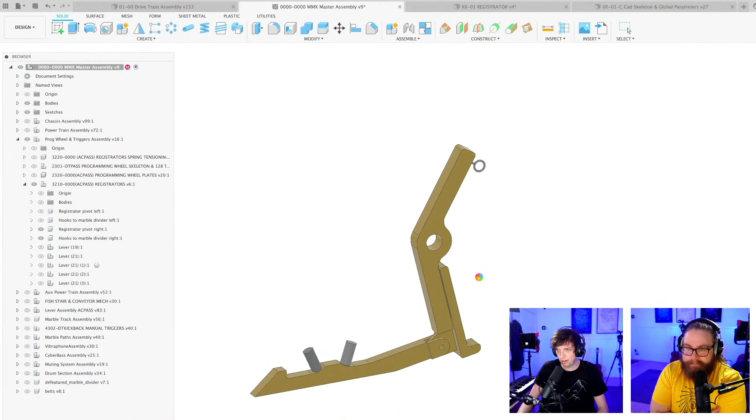Woo-hoo-hoo-hoo. Here we are. Hey everyone, let me show you the registrator of the Marble Machine X. Here it is. And for a long time I've been thinking about how to make a much better one. And this is the purpose of this stream. I'm gonna show you my idea and I'm gonna CAD that, and it should be a pretty simple project. Hope you're doing great. Let me tell you what the problem was with this one.

As a little reminder, this is the Marble Machine X to the right there. And you can see at the top of the machine, you can see them kind of sticking up there. So let's look at this registrator.

How are you, by the way, Hannes? Oh, I'm so good. Just waiting for it. I'm perfect. I got my thinking oil freshly brewed right here. Cheers. Ready to dive deep into this solution you got working on right here. This morning stream was a horror show, and I want to take revenge in getting something productive done. It was right out horror show. I've been like bathing in my own shame during the lunch break. Let's get something much better done.

So the system, this thing right here needs to be adjustable. And this is my improved design that I'm gonna make today. How to adjust this, because this little thing that looks like a foot here is the thing that interacts with the programming wheel, and we want to adjust it sideways, which will give a very, very nice way to adjust the timing of the music. So we needed that function, but the way we designed this on this machine is that

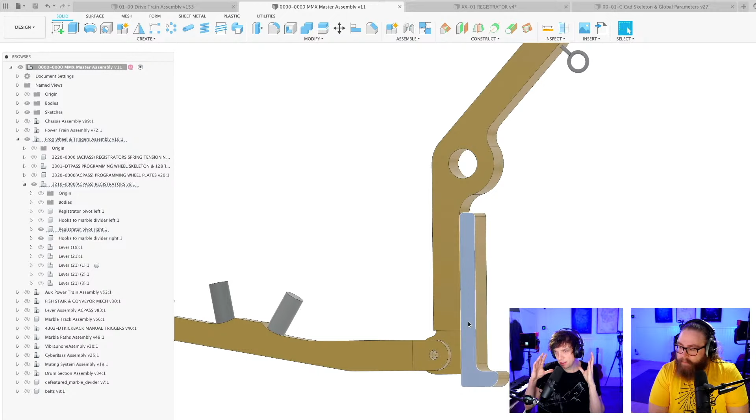So involuntarily, when I adjusted the timing of the thing, I couldn't repeatedly put it back in the same position with just one change. It also went up and down, left and right, and it was a huge mess, and it took a lot of time, and it was not user-friendly. I thought it was like a one-time setup. So for a long time, I've been thinking about how to do this better, and this is the first sketch, and I'm going to block this design idea up.

And an important thing is that the programming wheel, the programming pins are moving at a curve. So let's make a fictitious programming pin right here. So this is it. And if you think of the surface of the programming pin rotating around the programming wheel, this construction line here will represent the movement.

I want to shift the registrator position along this curve. So regardless if I shift it, it will always hit at the same angle. So if I exaggerate a little bit, if you think of here, the programming pin will tilt like this. And if we shift the registrator backwards, the programming pin will tilt like this.

So what I've come up with is to use a slot that is curved with the same radius. So this slot is not a rectangle, it's actually a little banana shaped along the surface of the programming wheel. Nice, huh? Yeah, and no rectangle patterns. Absolutely no rectangular patterns. They have been forbidden. Banished from the surface of the earth. So I'm going to, you know what? Let me just block this a little quickly.

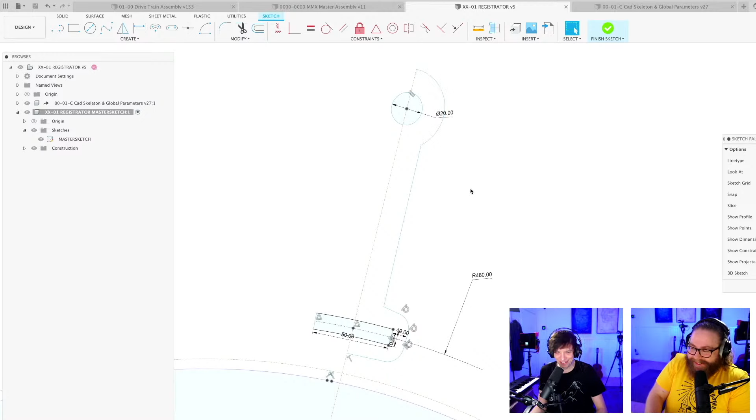Do it, and I will just say greetings here from Sebastian Hornbeck. He says it's nice having these streams running in the background while working from home. Keeps one reminded about getting hydrated as well. That's right. We bring essential functions to your life, right? Not only just CADing here, also reminding everyone to stay hydrated, even if we forget sometimes, because it's too much fun doing these streams. I've been drinking so messily on the streams, and I was like, why am I doing that? And I realized that I've been trying to drink faster than I normally drink. So I've been like pouring water all over myself. And so another stream objective for today will be to drink slowly once I'm drinking. I'm sure there will be time for that.

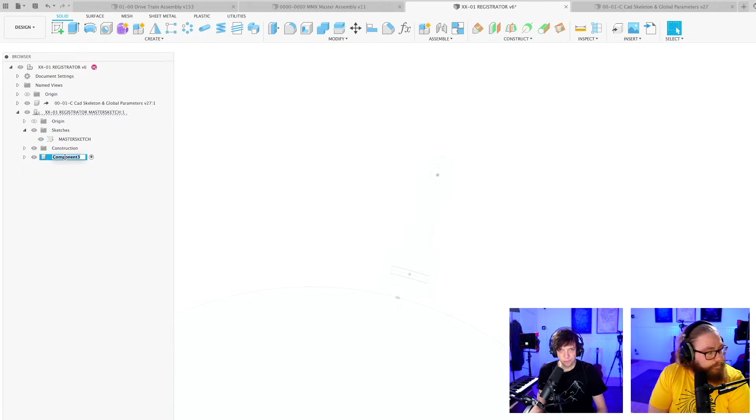You know what? Let's remove this. So I want to make a blocky version of this to show you the idea. So I remember when working on the Machine X, I was standing behind the ladder trying to fix these things, and it was an absolute pain. New component, side. I'm just gonna call it side. I'm gonna extrude this, extrude 4 millimeters. Doesn't really matter. Let's give it some chunk. 6. Oof.

And then we want to copy this part. I'm just gonna pull it over for the sake of argument. 22, something like that. And then in the master sketch, we are going to give this wall a little bit of a thickness.

So what I want to have is a set screw. One single screw that is accessible at all times that I can turn with a screwdriver that automatically adjusts the timing. No parts coming loose, nothing to disassemble, just a classic set screw. Turn clockwise for earlier, turn counterclockwise for later timing. And that's how you will control these. And I think that's something that I learned the hard way when I became a better designer. With 10,000 parts, if all of them are hard to reach, it's just going to be a horror show yet again.

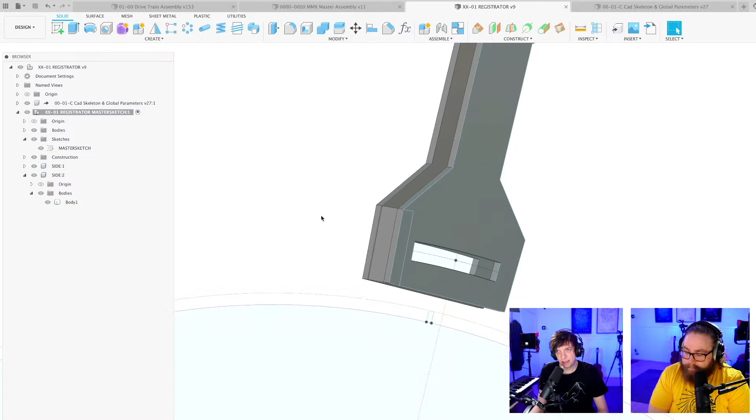So in this, it's a little ugly. Children, close your eyes. Oh, good. Mr. Gonsonator is wondering, will the registrator travel be shorter in this version? Not sure yet. I don't know yet. It could potentially be shorter because we need less. I mean, shorter would be more precise, I guess. So yeah, I don't know. Can I move this over? No, I can't. Doesn't matter for the purpose of this discussion. Oh, that body ended up there? Okay.

Let's redo this. Let's actually delete this thing. I'm just going to clean up my act a little bit. Let's copy this body instead. 22 millimeters, boom. And let's now extrude this while we're in the correct component, so we can join these together. Join, good.

So on this surface, I'm gonna cut a slot for the set screw. So this is where you will access the set screw from, hopefully from a good simple direction of the machine. Looking for the middle there. And then I'm making a center point slot. There we go. This is honestly more productive work than I did in the whole first stream.

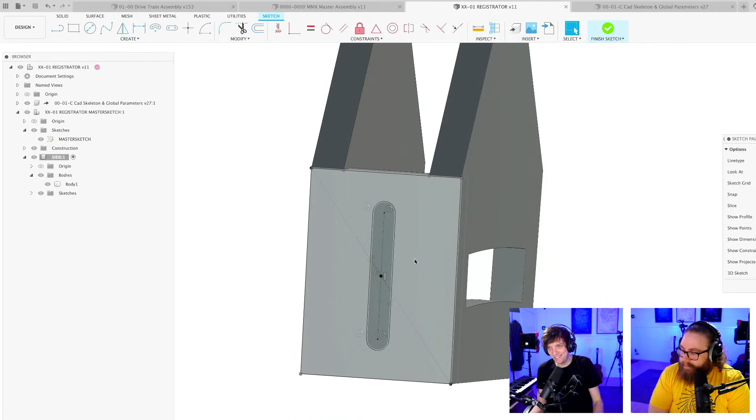That's not true. Nah, stop now. We learned something at least. We learned something, but it was painful. But we learned that we know nothing. That's one Socrates thing that I think is very prescient. I know that I know nothing, or something like that. All the Socrates quotes are misquoted, so don't at me. Don't come at me, bro. Don't come at me about Socrates. Since I only know that I know nothing from Socrates, I also don't claim to know anything about Socrates. But I do think Greek philosophy got a bad, like Stoicism, they call it West yoga. And yoga in Eastern countries was uninterrupted by religion, whereas in Europe we had Christianity coming and pausing Greek philosophy for like 1,500 years. So I do think that the Greeks had some really great points. But did they build a marble machine though? No, they didn't. That's true. They built a lot of marble statues.

You know, I went to a radio interview once in Swedish national radio. Yes, please tell this story. The journalist was like, okay, so you built a marble machine. Where did you get all the stone from? I was like, stone? Yeah, all the marble stone. And isn't the machine very heavy if it's built from marble? And you're like, mainstream media, thank you so much.

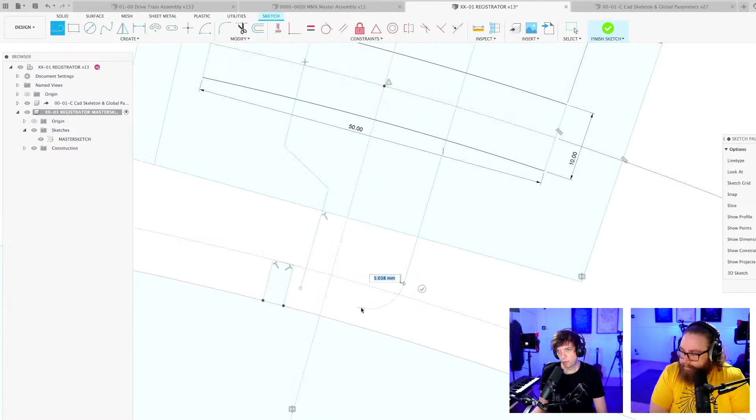I thought about this so much and I kind of got this idea like yesterday or today, like, oh, but this is a simple place to start anyway. So this is probably Delrin or POM. And now again, yesterday we talked a lot about the offset feature of the extrude command.

The command so brilliant, you want to marry it. Yeah, there was a person in chat wanting to marry the offset feature, and I totally understand why.

So let's call this reader, POM reader. So now I still only have one sketch in one plane, but thanks to the offset command, we can do extrusions where we need them. So if I take a look at this from this perspective, and I can zoom in and show you with my new higher zoom grade. Look at that. Enhance. So start is going to be an offset.

And we built our wall 6mm thick, so let's offset it 6mm, I think. And then let's make it 10, no more. Was it 22? No, 22 minus 6. There we go. So now I've extruded this exactly in between. Boom. And now this part sits in between, away from the sketch plane. Let's paint this Delrin black.

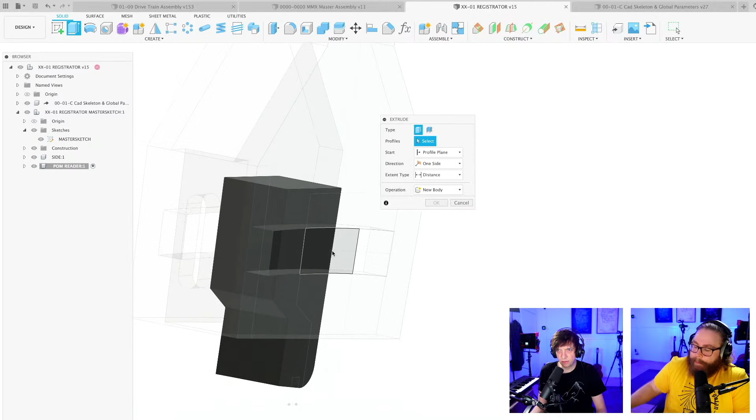Now again, we're going to make another extrude because these are going to be the things riding in the slot, keeping the part in the slot. So I'm just going to extend this to this side. Boom. And we're going to join. Boom. So if I hide the sides, this is what we have now. A nice little part, but we're not done yet. We, of course, need the set screw. Of course.

Yeah, I don't know why this was so funny. Maybe because I'm more light-hearted now. Yeah. I didn't know how to act the first stream, if I should try to express my frustration or if I should realize there's larger troubles in the world. Yeah.

It looks a little bit oversized, but that's okay. Let's now cut a hole in the... Let's isolate this. So these small differences are going to make... this is why I wanted to start over. Like, do it again, do it right, kind of thing. So what kind of fastener should we use? M6. This is way oversized everything. M4 would be enough. Let's put M6 right now.

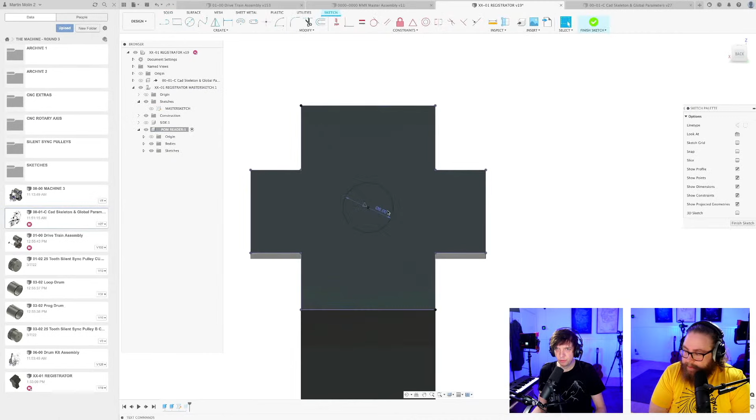So this is just a through hole, and then on the back side here. Oh, I almost put another sketch here. We don't have to do that because of the offset command. This is the whole reason. So if I show you the timeline, we can reuse this sketch that we already have. Yeah, because of the offset. So let's make a little polygon. Circumscribed polygon. And I don't care about the size now. It doesn't matter because this is just blocking to show the idea.

And now we can extrude that little polygon. But we don't have to extrude it from there. We can extrude it from wherever we want to. So let's offset it. Offset -12, -20. Distance to object. We want to cut to here. So there you can see a nice little nut retaining cavity.

Du, du, du, du. Are you playing the wedding song for the offset command? Go. Let's add some fillet. Let people think I can CAD. People will think. What a difference a lunch makes. Just one little hour.

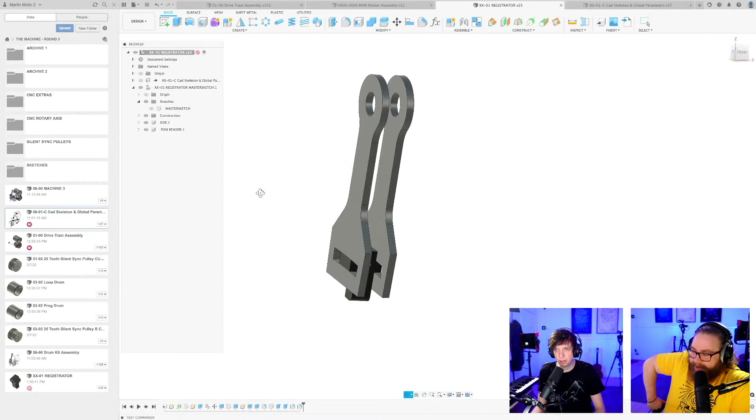There we go. POM. And what happens now is that we need a little fastener. Fasten your seatbelts, everyone. And I'm going to not import it. I'm just going to... And chat is screaming here now: how will you insert it inside? Good point. Good point. Gretzkys are on the puck as usual. So either we open the thing up here because it will have enough. If we open it up there, we have a longer travel. Let's do that for now.

Yeah, Gretzky's in the chat, skating where the puck is going. I love that so much. Oh no, someone has seen through my charade here. Alexander Weichselbaumer: Kudos to Hannes, who has no idea what you're doing, but still supports you. Oh no, the ruse is up. Oh no. That is honestly 80% of our audience. Boom. Oh, wow. Just joking, just feeling victorious.

I have a... what is happening here? Why is this? What happened here? I don't like the yellow sketch in the timeline. Review warning. Compute failed. Oh, yeah. That's no problem. What? Sometimes it helps. Yeah, this is clearly... Maybe it helps if I just do this.

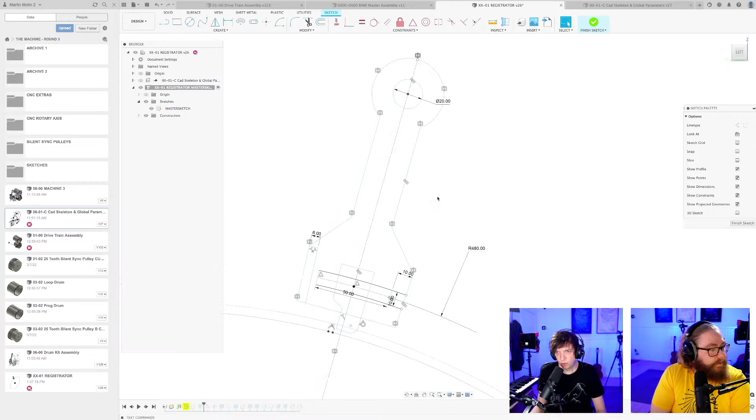Oh, it's not a whole profile anymore. Why not? Did I not close it there? Weird. So now when you see that this profile is not whole, you can always pull a line over and see where...

Hans Brech says here, just screw the side blocks in and cut them off. Screw the side blocks in and cut. With... Oh, you mean you screw them in?

I have to fix my sketch here. Something is wrong with my sketch. Fix your sketch, man. Yeah. Come on now. Fix my act here. What is happening? Honestly, Fusion has been acting up today. A bolt and a nut. Lord Socks on Discord. It's gonna come a bolt and a nut.

I'm just trying to find why my sketch thinks that this is not a closed plane, because it is a closed plane. Isn't it because you have a line that have no material in both sides? Oh, well, look, even when I draw a circle, Fusion doesn't recognize this as a thing. Let's see how this sketch behaves in another design document. See, it should become blue like this.

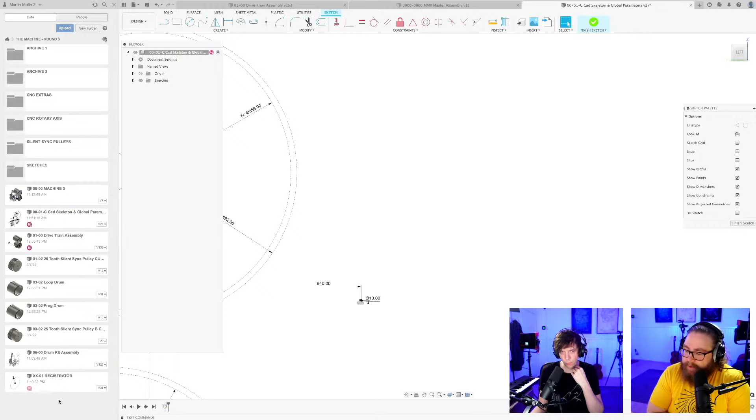Perfect time for me to read this beautiful message right here from Mandracool. I just want to say thank you. I got COVID over the weekend and I've been in bed with a high fever since yesterday. I'm so glad you guys are streaming because it makes my day feel a little bit less miserable. Heart. That's nice to hear. I hope you have a quicker recovery than I had. I wasn't that sick, but I was bad for a long time. Yeah.

Okay. Let's make another sketch, just for more info. Compute failed. Failed to generate profile as curves do not precisely overlap. Here is a good... I think I can show you that. Enhance. Curves do not precisely overlap. I think something happened.

Okay. Look at that. Sometimes Fusion goes crazy. I just added 2 lines and now it's back to working. That feels buggy. So I have a hard time knowing when to blame Fusion. And we've learned always blame Fusion. Here we go. Now we're back in business. It was a strange bug.

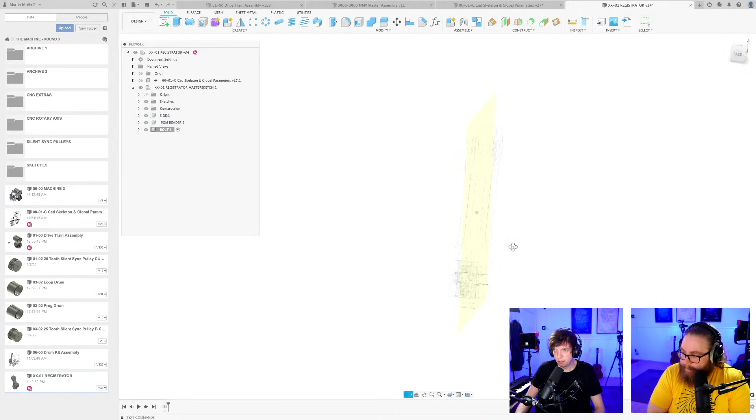So let's make the bolt. And a nice way when you want to make a bolt in the middle of your design, because I haven't made it around the mid plane, is that you go up here and you choose mid plane and you just select the outsides of your thing and you get a plane straight in the middle of it, and we can use this for our revolve sketch that we're gonna make.

So I wanna get this little line. I want to get this line. That's basically all I need. What happened with that line? Project. Thank you. And then my new favorite way of making all cylindrical shapes is to cut them from the side and revolve them. So let's do this. So I'm cutting half the bolt here.

And I want this line to be parallel with you. I always love it when you show these tricks and tips. I know a lot of experienced CADders might roll their eyes because it's so extremely basic. Still, sometimes you have to just get back to basics. You can quote him on that, boys.

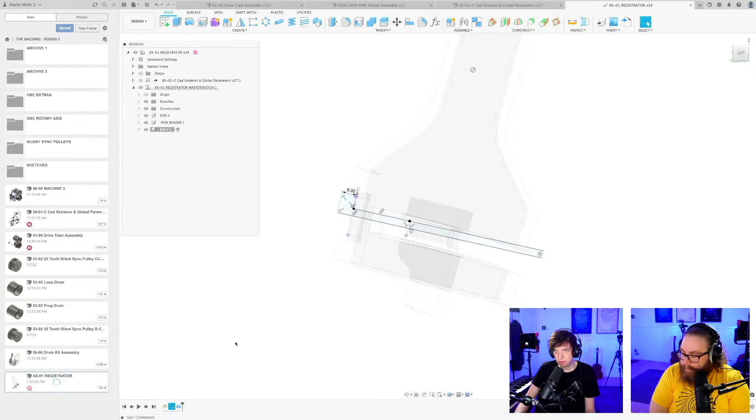Boom. And I mean, to make it painfully clear, let's add a hexagon here. Oh, yes. Polygon, I mean. Boom. I'm not even going to center it. We don't need that. No.

And there's different ways to make the screw stay in place, but I think one of the... So you can have a compression spring here, which I think is very classic. And you will need a nut here with a lock nut to make it not spin. I'm scared of a compression spring. So I don't really know how to retain the screw position without a compression spring.

Is this... you could use a smaller screw if you used a set screw from the side? Use a set screw from the side. Yeah. So from the side here, you can't access because all the registrators are hiding each other. I think that doesn't work. I don't know how much travel we need on this adjustability.

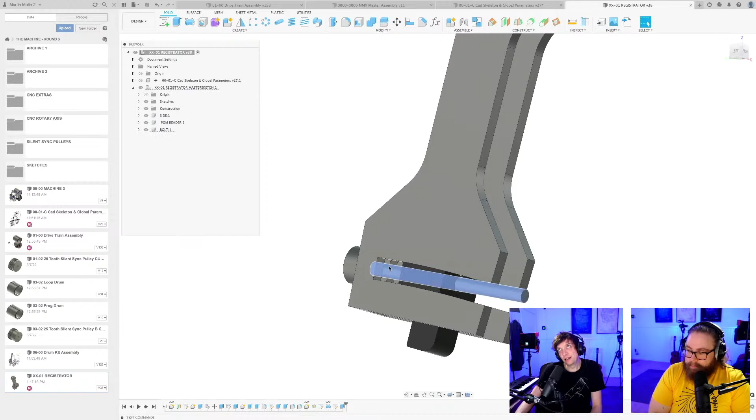So you could put a strong lock nut here, but I wouldn't trust that. So now the question is how to retain this. Like, I almost want to build a cage for this. A cage? Yeah, a cage. Okay. How could we do that? Okay, so chat, what do you think? I'm gonna show you the options.

I'm gonna make the coil, the compression spring, which is the classic way. So spring, create a coil on this surface here, like this. This will get a lot of votes because it feels right, but I'm worried about the range. Lock rings, cross pin. Ring with a cross pin. That sounds good. What do they mean, actually?

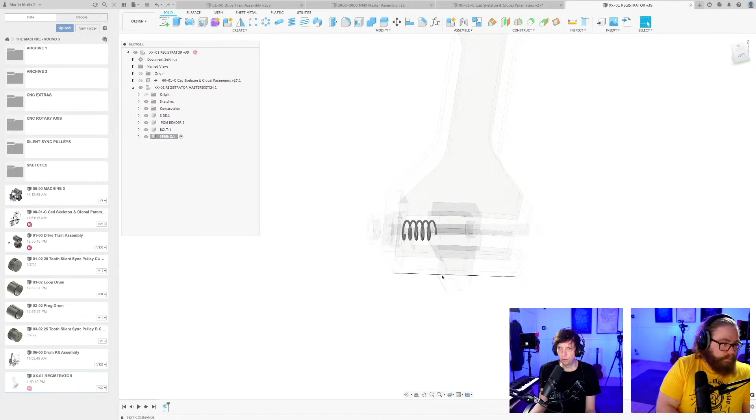So this is alternative one, a spring right there. I don't want to do that solution. A cross pin. Basically, we need to stop the bolt from moving to the left in some smart mechanical way.

We can use maybe a nut with the strongest... like super low tech would be a hex bolt on the inside here, and then somehow. But I don't want to rely on friction fits. I want to rely on mechanical fits. It's a big lesson from Marble Machine X. So. But anyway, let's present this as an option.

New component. Cotter pin. Stack bolt. Cotter pin. So let's use the same sketch as we used here to just CAD the... No, let's not. Let's use this one. Cotter pin is something like this. Ooh, yeah. The first one to the left there. With those. Yeah, this is... Yeah. That is pretty nice.

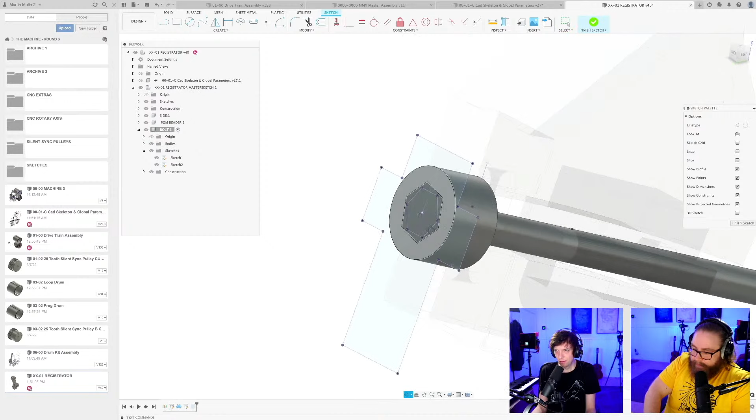Jairo Cabello: this deserves a new section in the Google Sheets file. Please create it. Good idea. Drill a hole through the bolt, stick a cotter pin through. Caveli: small spring on the screw head side and a C-clip on the other side. Oh, the cotter pin could sit here. Yeah.

Only problem is that we need to have this slot here, so the pin would need to be a circlip. Yeah, C-clip. Here we go. Circlip. Is that what people mean with C-clip, you think? I guess so, right? That's the solution.

So this is a great demonstration of why I love to revolve plane sketches, because now we want to cut a little groove in the screw, and that is too easy from here. So I can just cut this little groove for the C-clip. There we go. Something like this? This is the idea. Here we go.

Gretzky's in the chat. You use something like that on the MMX, right? Yes. Yeah. I have 100 million. Great.

So we might have to custom machine this. It's not a big deal. So I just make this little pocket here with some ugly CAD. And when I revolve, I just do not revolve that little thing, and look at our beautiful circular clip thing we have there.

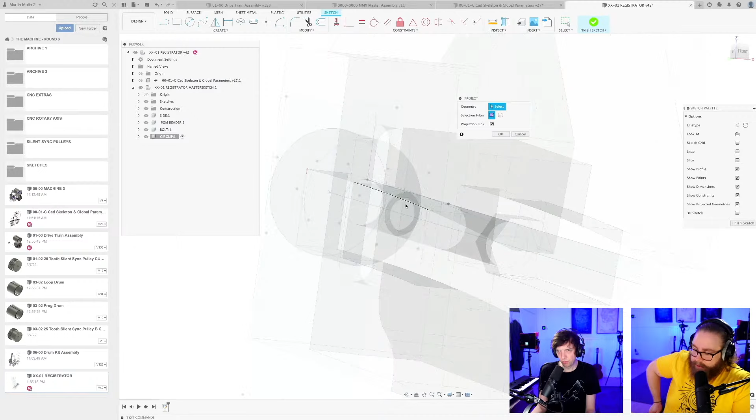C-clip. I'm just making a sketch of the C-clip on this little plane. Boom, boom, boom. C-clip with a washer. Oh, you want a washer for retaining the... Yeah, so the C-clip, good idea. C-clip with a washer so the C-clip can't get caught on the edge of the slot.

Very good idea. Lucas Sokol. Lucas Sokol, official Gretzky. Oh! In the Hall of Fame. Not in the Hall of Fame yet, but okay. Probably getting going there this season. Yeah. Getting there.

So again, virtue of having this CAD, we need a place for a washer here next to the C-clip, and then we're just moving this over, and we're making our washer.

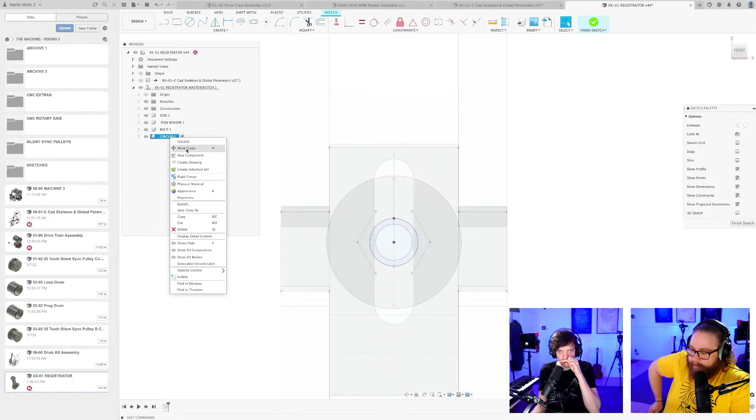This is fun. So let's revolve our washer. This one. Around this one. There's our beautiful washer. And now let's go back to sketching the C-clip. So let me just isolate this. People are worried about the rattling noises eventually caused by all the C-clips. That's a good point. Yeah, that's a good point.

Martin Raspaud: a single bolt inside the POM reader or tapped Delrin will be simpler, I think. A single bolt in the reader. So since we're gonna adjust this several times, I'm not sure we want to rely on plastic threads for that. I actually think that it would suffice, but I don't know.

Here's our beautiful C-clip. That's the C-clip. Those two holes are for the special tools that pull them apart when you put them on. Then they snap in place and they just sit mechanically still. So washer material, something that doesn't rattle, perhaps? First name, last name says use nylon washer. Yeah, genius mind thing to say.

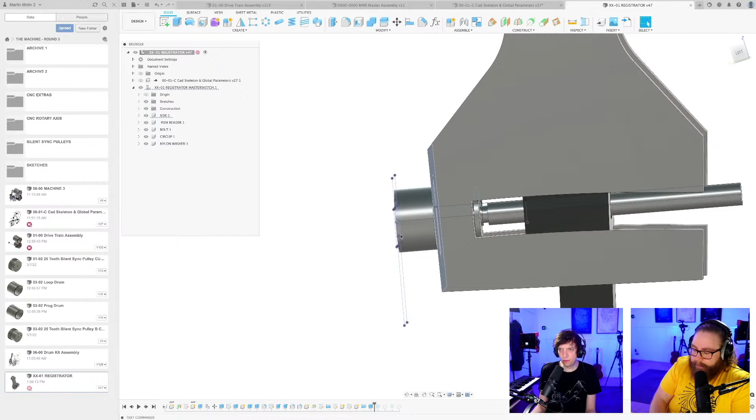Brian Denise: Martin, maybe I'm wrong, but I think you're making a mistake. The space is curved, but the bolt is straight. The registrator pin will get jammed. No, that's why we have the slot here. If this was a perfect hole, so the head will not sit perpendicular to this surface. So you can see here, the bolt is actually tilted. You can see that the space up here is a little bit smaller.

And so the bolt will swing with this motion. If we also look at this radius, I think the bolt will swing 0.1 millimeter or something. So it won't stick. But my slot is the wrong width. Let's add 6 millimeters here.

So yeah, this doesn't look super elegant now, but I'm super happy that we have a mechanical solution with no springs. And I think this is a much better design than on the first machine. Let's just tidy this up a little bit. We can use the washer for that.

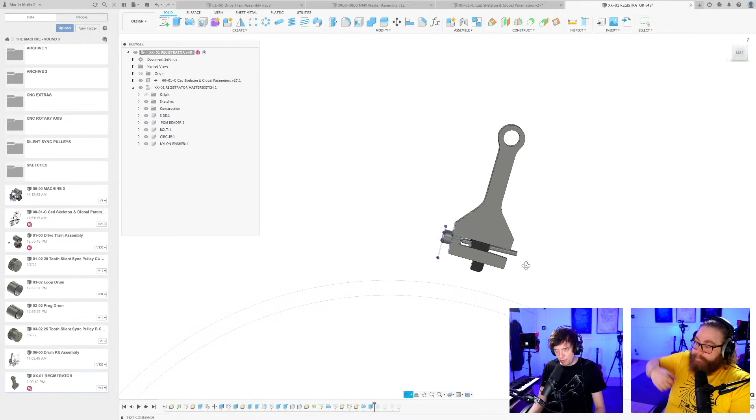So it looks huge right now, and I don't know the materials and stuff. We could make it stronger by connecting it down here. Let's do that. We already made an extrusion feature like that. So let's just make a little 4mm connecting wall here as well. Currently, I don't know the material, as I said.

FL3UE3: warning, be sure to have enough space for circlip. That's a good point. Do you definitely have access enough to apply the C-clip during build? Ooh, that's a very good point. That was from Benjamin K. Yeah, that's a very good point. We have to... yeah, that's not super easy, because the whole idea with the C-clip is that you can't put it on when the bolt is on the outside of this thing. It would be if this thing screws on somehow. Very good point.

CH Crane: nylon washers between all metal surfaces where possible, i.e. bolt heads and other surface. So I'm just strengthening this thing over there. And I think that point about the nylon washers is worth a visit to our... this is the problem I had with Fusion 360 in the beginning of the stream. Let's go over here.

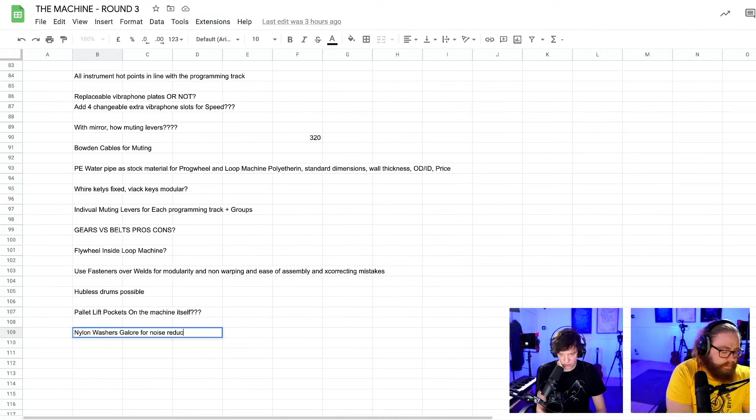Nylon washers galore for noise reduction. I don't know how soft nylon washers are. Like Gus Van Mar suggested, I would use an E-clip. They don't rattle because they clamp the shaft, and you can install it instead of a C-clip. Okay, can you pull that up? I recognize this from the MMX as well, right? Something like this.

Oh, is that an E-clip? Wow, cool. So you just push it on. That will be easier to push in place. Okay, interesting. Are they equally trustable? Probably the industry has solved that issue. Probably someone has done something like this before. C-clip or E-clip? I learned something today. Thanks for that. Interesting.

So you just push them. For example, because we were worried about the assembly, a clip would just be pushed in from the underside here. So I've used the wrong wall for this sketch. As you can see, they're not flush against the walls. So let's head back to this sketch and realize that all this has to be over here. And when I did that, all the parts moved over there. Let's color things a little so we can see. Nylon. What color is nylon? White maybe?

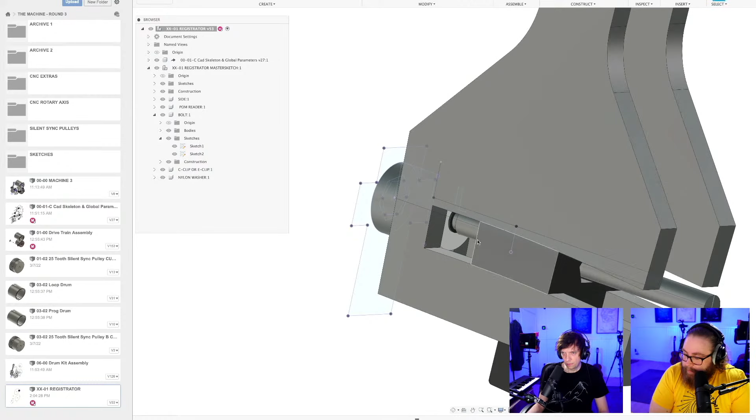Oh, that's elegant. No springs, a mechanical lock. And I like it. Although I don't know how to make this part yet. This is the principle anyway. Imagine when we're having 60 of these next to each other. Where did this go? Oh. Here's something informative as well.

Becca64: all your home appliances, anything with moving parts, use a ton of E-clips. Okay, that is very good. So the correct E-clip into the correct groove. If they put it inside home appliances, they don't want issues with that 10 years later. Means that it's a solution we can trust. Cool. So let's make it official. E-clip. And of course we should make it look like an E-clip as well. The E-clip doesn't have these holes.

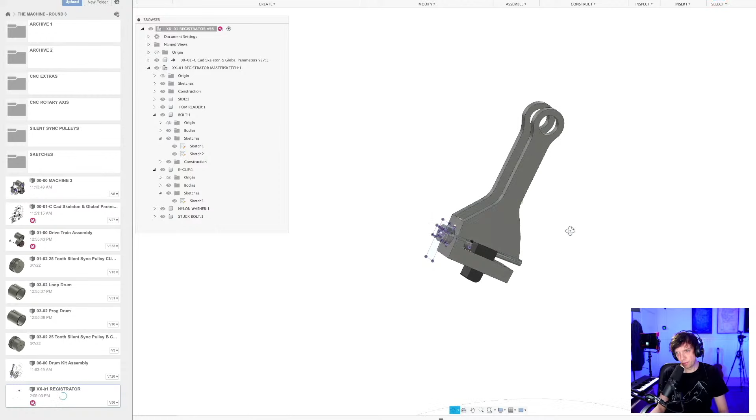BRB. So here's my stylized E-clip for now. That's a good representation, I guess. So what kind of materials do you think this could be made from simply? Wait. Maybe we don't need two walls. I'm just thinking a more open design where this front wall is not needed. Because we want to be able to build this small.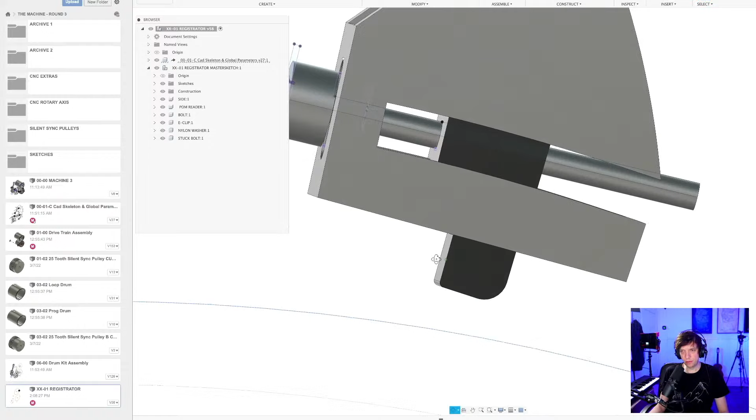Now I'm thinking maybe there's a solution where the Delrin rides on one of those, and the programming pin hits immediately under center here, and the adjustment is off center. But the main idea is to have something very easy to adjust. Let me show you. When we move this black part back and forth, it will follow the curve of the programming pin, meaning the programming pin will always hit this black surface perpendicular, which I think would be great.

So I'd welcome suggestions for making this part small and simple. I'm thinking, if we only had one and the adjusting screw was to a side, would that actually matter? Because the load would... I'm going to show you my idea. I want to make almost the exact same thing. Let me just copy this and paste new. This works sometimes. So now I'm in a completely new version. Let's start from the beginning and show you my idea with only one.

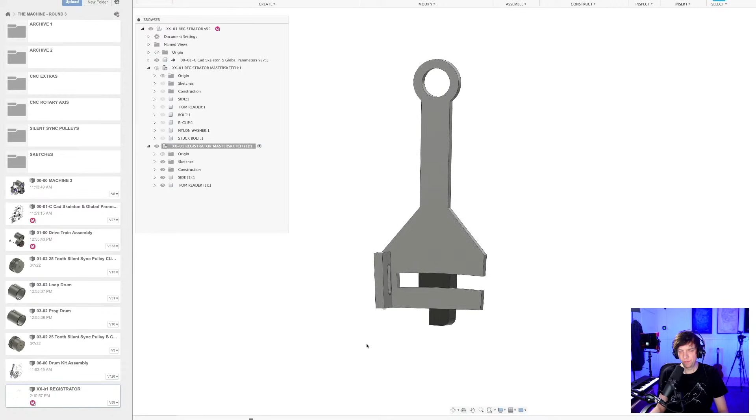So this is the one, something like this. I'm going to delete this copy paste. And I'm going to edit this extrusion feature, deselect that profile and extrude forward instead. This is going to be the place for our little slot. Oh, the slot accepted this. Nice. Now I want this part extruded in the middle. Let's redo this extrusion feature and fix the offset. Extrude it from the profile plane, symmetrical for now. Like this.

Okay, so now the bottom curve needs to be curved as well. If this works, we would have full access, and we can use a circlip here because the wall is not in the way. So this bottom line now needs to become the radius from the center of the programming wheel as well.

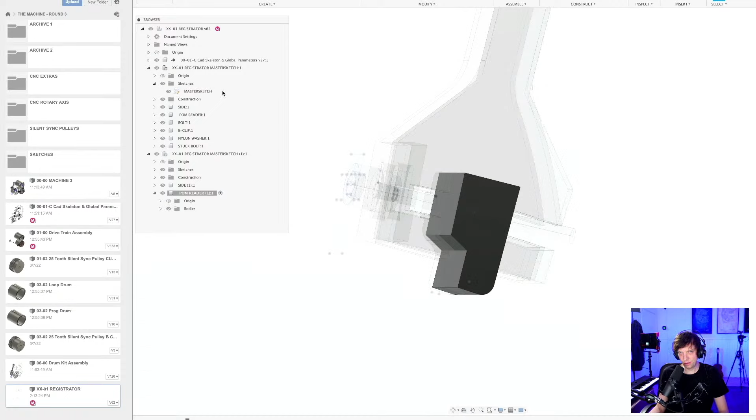Oh no. Oh, I'm back in the... Sorry, I was back in the copy. I was in the wrong one. Jesus, I'm stupid. Thank you. I chose the wrong master. Okay, now I know what I was doing. I have two almost identical copies of this, two versions, and all of a sudden I started to work in the wrong one. Stupid, but understandable. Here we go. Order is reinstated.

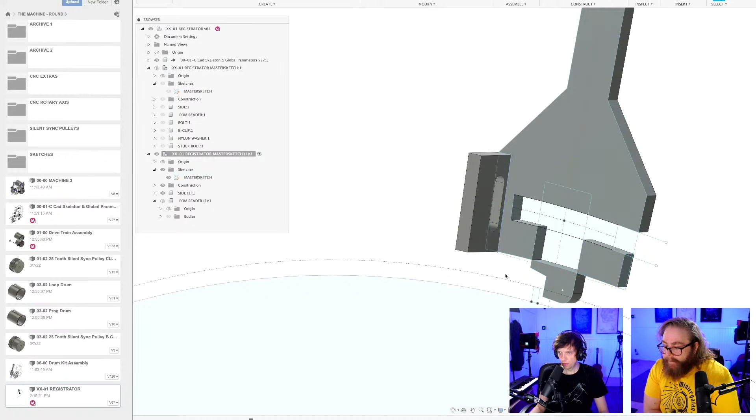So probably the immediate thing against this design is that this is not an obvious slot to cut in this part. But bear with me, let me just try this. It's a huge mess. Edit feature. Yes. Thank you. Yes, good. I'm trying to make it a little more elegant, Hannes. What? Quick and dirty does it.

Okay, did we run into any problems while you were gone? Yeah? It's this one. Let me delete this feature. Delete. Good. No? Everything is perfect? I do not think so.

Now I'm going to cut this thing out of the POM reader. And this is, of course, an impossible machining operation. If you want a curve, you probably do not need a curve. You can cut a rectangle in this and it will be fine. To this object, and we're gonna cut, and the part we're gonna cut is the POM reader only.

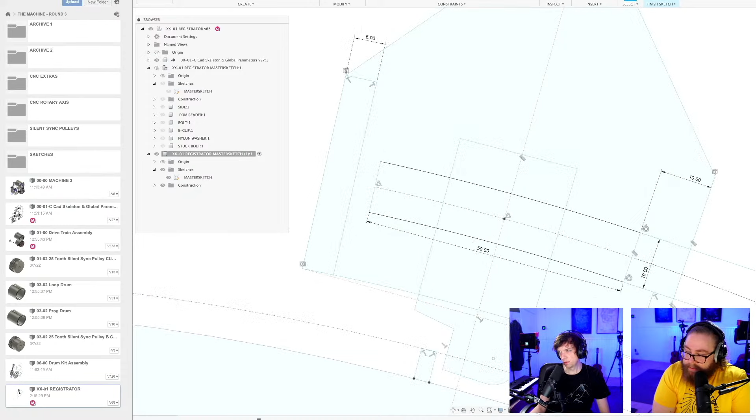I just want to demonstrate. So what do people think about the one layer version? If you see where I'm going with this. The one layer version. Of course, I should cut it in two halves, like icon says. And then you have to put them together somehow. Inuyasha: what is he actually making right now?

Good question. We are making a better version of this because this was hard to adjust the timing. Every time I adjusted the timing by adding shims, I couldn't replace this in the perfect position. I didn't really know if the timing was adjusted because this sat in lower, which ate more of the programming pin, which made the marbles play faster. So basically, I'm trying to isolate the function here completely. So here you can see there's a slot through this black thing, and it rides on this metal rail. And now we have to add the screw.

Luke Maffey: I like one layer. Okay, cool, Luke. Me too. First name, last name: you might end up with twisting stresses. Yeah, so the programming pins are still going to hit here, right under this. And the twist will not be on the screw. The screw will be on the side. Yeah, there will be some twisting, but maybe it's okay.

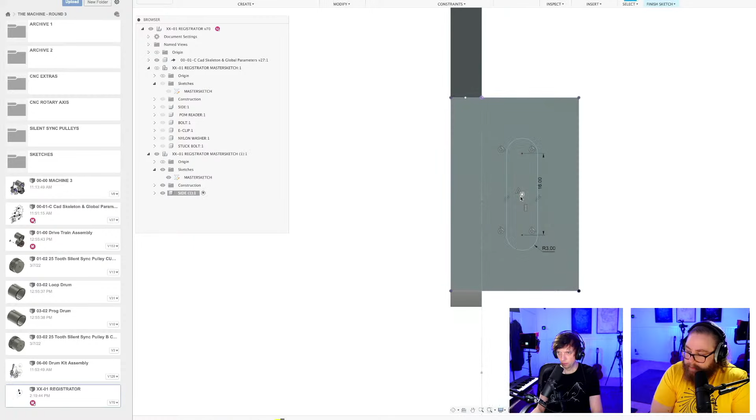Let's check this sketch. Let's put the slot maybe a little bit more there. Comme ça. Like this. Let's edit this sketch, which is the hole in the POM, I guess. Let's put it somewhere where it makes sense. Here. Look at that.

Desert Pillar: single wall is better from the perspective of it being possible to insert the Delrin, which is not possible on the two-wall version. Blinking smiley face. Yeah, okay, when I put this wall in, it's not possible anymore. You're right. You are absolutely right. And I think single wall might naturally be sleeker.

Eduardo Albergaria: I am not sure about the scale of that. Can you give us something for comparison? Oh, that's smart. It's way too large right now. This is the programming wheel. I'll insert a 16 millimeter marble for comparison. Create a sphere. Here. 16. Here's the marble. Okay.

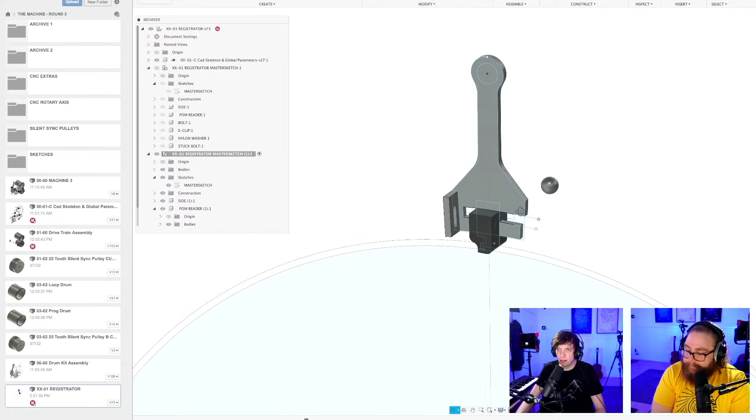And I want to use precision pins. So I'm also going to add down here the correct size programming pin. I think we're going to use 3 millimeter precision pins. They're going to be very small. Look, 2 almost, I guessed that one. 3 millimeters. Let's say it protrudes 10.

And Rick Tegelar with the important question: will you leave room for some decorative washer stacks? No. No. Okay. Washer stacks is a thing of the past. They will be the opening act on the world tour.

Now I have the same graphic card crash in Fusion. No, I want to show them this. Okay. This horror show. Because it actually worked. This is a graphic card crash that I was researching before. And I haven't found... People say they are changing their Radeon graphics card to get rid of it, and I think that's what I have. They changed to NVIDIA, and then it worked, or something like that. So part of this morning's horror show was a black screen, black screen of death.

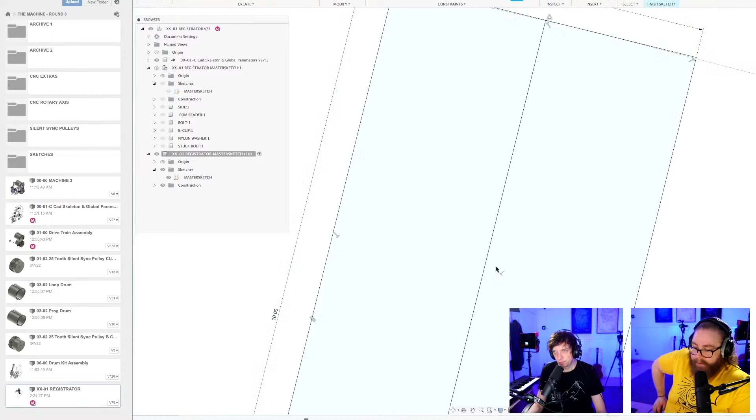That looks better. So why now is this not parallel? Is this not? Okay, that was a constraint I was missing. So now let's just revolve this programming pin for scale as well. It's a good point from someone in the chat to provide some scale. Let's make a new component.

There's so many new t-shirt ideas here. Precision. Mike Perry just said, will save and cheers become a new shirt? So a lot of brilliant ideas coming here. Save and cheers. It's actually a very positive message. Number one should be, it preys on noise, right?

That's the pin. It looks like it's protruding too much.

It preys on noise. That was hilarious. Someone missed it. It's the commercial tagline for the belt we're using. They made a fantastic... I mean, the tagline just hit our hearts immediately. It preys on noise. We should say the same about nylon washers. They also prey on noise, right? How does that sound then? Nylon washers. Doesn't have the same ring to it. No, the eagle. We need the image of the eagle to really get into it.

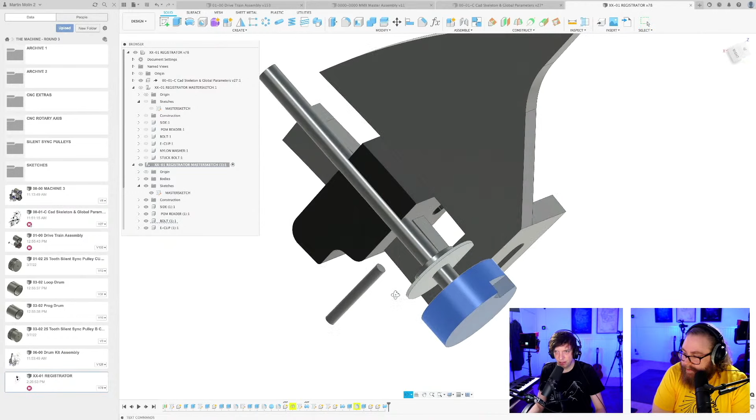Okay, here we go. Let's move forward with... So let's ignore the timeline. I'm just going to move these things over. Some CAD days I feel in control, and some CAD days I'm running after an airplane that is lifting, trying to get on board. You be the judge of what day I'm having today. Where is the nylon washer? Here it is. Beautiful. E-clip bolt. Move all this gloriness over. I can and I should center this. Point to point. Choose that thing. Choose this thing. And then let's just...

We have to fix this sketch. So it was actually really hard on the previous registrators when I was adjusting them, I didn't really know what I had adjusted. And it took a lot of time. I was dropping the shims into the machine. Now we can just go up, move a screw, and that's it. Turn a screw.

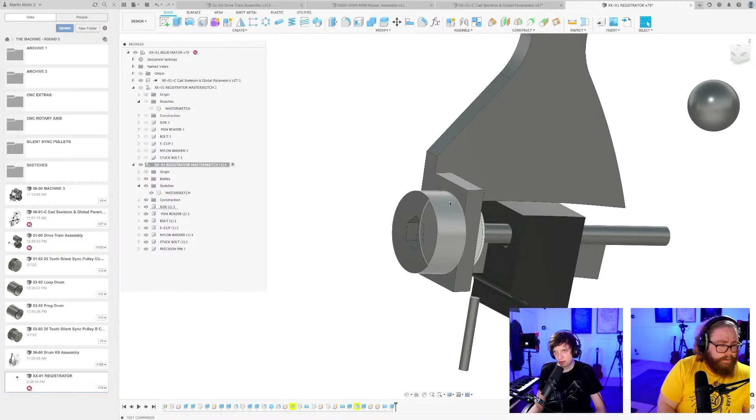So let's do some children-close-your-eyes CADing here. I say that every time I'm using bad CAD practices. So basically, maybe we should have the South Park disclaimer. This should not be viewed by anyone.

Okay, this is... I like this. So now we should have two ones to compare with. If I hide this one. So here's the double one, where we had problems with access and also the POM reader can't get in there. We could if we cut this wall open, so... And then we have this one. Mm-hmm. What do you think, Hannes? Form follows function, right? Yeah, I think so.

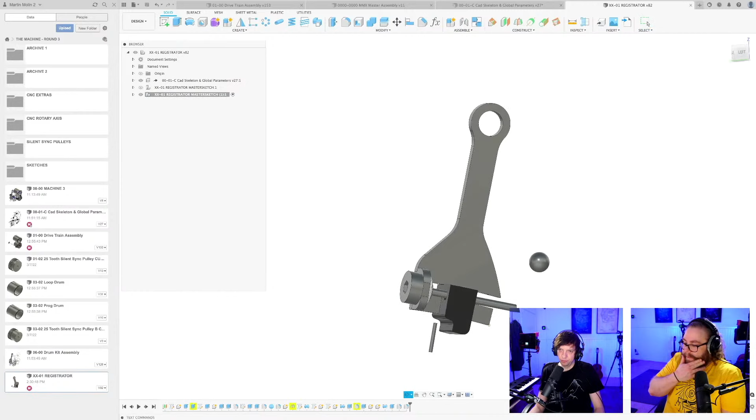Let me... Somewhere this got filled in. Hole up here. Let me just find what happens here. Oh, yeah. I fooled myself by copying this design. I never do that. So there we go. So if we think that the programming pin is hitting the middle under here, it's not doing that right now. I think all the twist stresses that we talked about previously will be taken up by just the fit of this POM thing on this thing. I like this. I think it's good. Boom! I think it's really good.

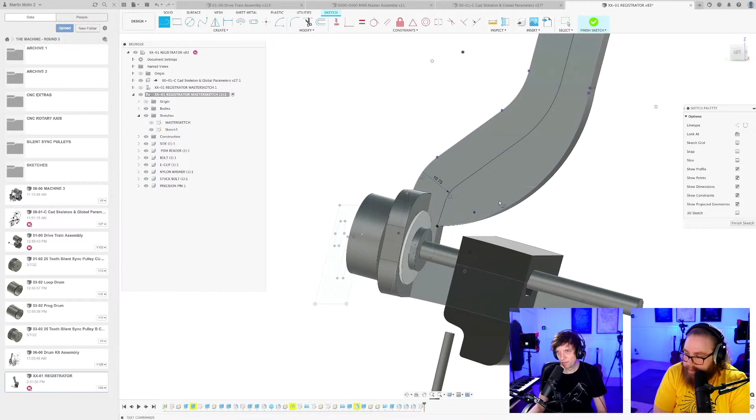So if I do this, this is really, really ugly, really nice. So I have two distinct different modes of CADing. When I'm trying shapes, I just go. And when I'm trying to make a parametric good design, I know how to keep things cleaner than this.

Don't have to excuse anything in front of us. We won't tell anybody. We won't go to the CAD council and tell them everything.

I mean, you would be hard pressed to remove parts from this, I think. Lucas Tuscherer, please round off the edges for sliding the POM part in. Skating where the puck is going. Gretzky right there. There we go.

Yeah, so this part could be a laser cut metal part with one weld, or it could be bent. Yes, look at this, because 24/7 Steel, that I want to use as a supplier, they can bend this. Oh, it's beautiful. They just bend this part, so we make a flat pattern, and they bend this little thing up. Let's mimic that by filleting. That's a cool idea.

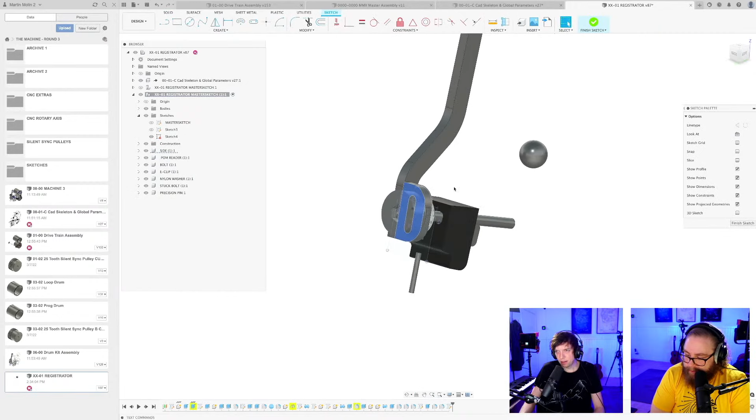Jose Torres, the metal where the POM lies on has to be parallel to the screw, otherwise the POM won't slide well. That is not true, because we have a slot here. Yep. So the screw angles, and if we check on this radius, the up and down motion is minuscule. So let's go in here and see the up and down. The difference from highest and lowest position, if we make a straight line, is 0.5 millimeter.

So you would need parts to be extremely tight if that would create an issue. But that's the reason for this slot. I think it's very elegant to ask 24/7 Steel if we're gonna make this in steel. Of course, maybe steel is not the correct material, but I love the idea to have a bent thing.

Side. Let's go in here. People are worried about the design, if it will be reliable, and if the bend will create a point of weakness, and the accuracy of that bending. Yeah, so first of all, they bend with CNC machines, so it's CNC bent. So the accuracy that we had when we made the marble gates was very much.

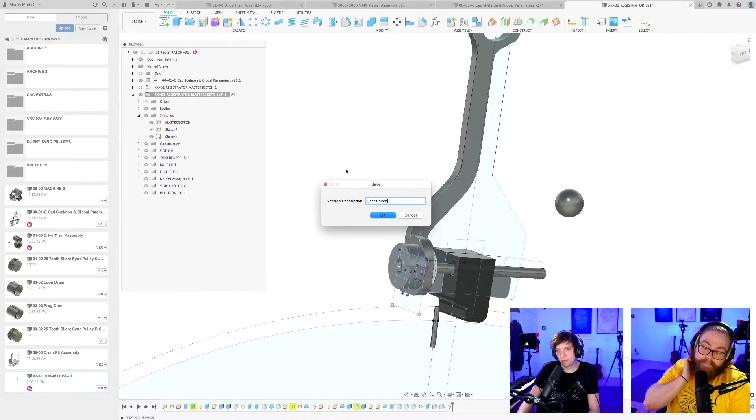But the accuracy we need here, the whole thing is adjustable, which means, it's an old saying from one of my favorite YouTubers, I'm blanking on the name. Schmidt. If you can't make it perfect, at least make it adjustable. So this whole screw is the adjusting mechanism. So if the bending is 0.5 millimeters off, it doesn't matter, because what we really care about is the position of this black part. That's the thing that registers the musical timing, and that is movable. So we can adjust for any inaccuracies in the bend. Bend it like Martin. There we go.

So another thing that is not yet in this design is a shear point. So we have talked about protecting the Marble Machine 3 from disaster. And these pins, the magnets we used on the previous machine broke when something went wrong. So I think we need to build in a shear point. And I think the best place to build it is in this POM block. So a shear point is a point where you weaken your part deliberately to make it break during stress. So let's just CAD that for fun, because we're figuring stuff out.

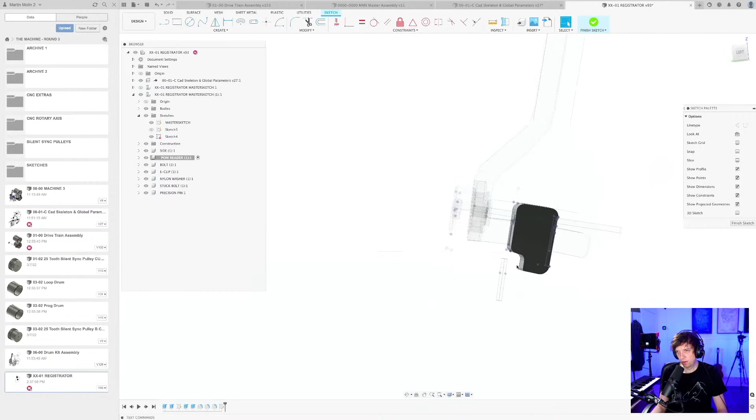So let's say maybe this would be hell to machine. Wait, from which direction would we machine this piece? Oh, let's say maybe we don't use this thing. Okay, never mind. So perhaps we just put a couple of holes like this, along a line. This is truly ugly. I said things were ugly before, and now it's truly ugly. I'm just making the point.

Object to POM reader. So here's the idea, and I think this is actually not a bad idea. I think just drill some holes next to each other with the CNC machine, and if something happens, so this registrator can't pivot when the programming pin comes, the underside of this POM thing is torn off.

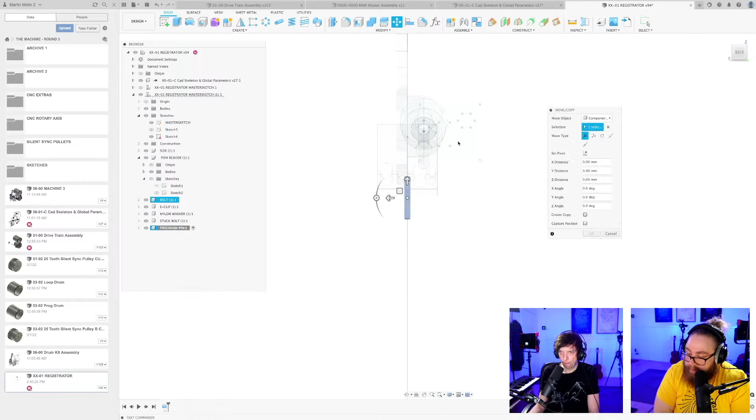David E has a comment here. Martin, for force distribution, just align the pin with the metal part, not with the center of the Delrin part. Yep. Great idea. It's almost there. Let's put it there. So I'm going to hack that. There. Which also means that this whole part will sit at the center of the programming track.

I think kind of this part is done for now. Yeah. It's not designed for manufacturing. It's a proof of concept. I showed everyone where it can go. And I think there's one more thing I want to do. I want to simulate the bend. I tried to create a sketch, but I realized that that's a curved plane. So I need to go into our first sketch in order to be able to do that. So I need to create a straight part here.

A lot of people are asking, for example, here Lucas Tuchscherer, sorry for the name, should the pin not be the breakable part as it is easier to replace? A lot of people are agreeing on this comment. You know what? We need to machine the grooves of the O-rings anyway. We could actually machine a break-off point in the pins as well. I would be scared of slowly having them being bent though. Yeah, and they could get stuck in the holes as well if the top breaks off. Yeah, Matt S just wrote that if the pin breaks, you would not be able to get it out of the programming wheel.

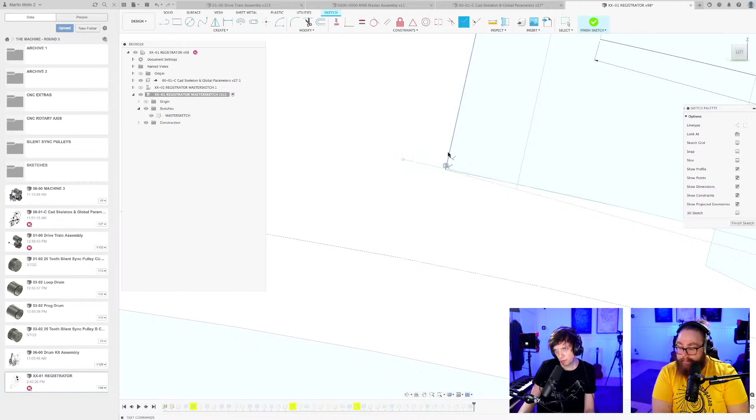Yet again, I edited the wrong version because I have it copied. Here we go. I have to just not extrude this little part, so we have a flat little surface under there. This is ugly CADing, but we're getting there. Side, boom. Now, since this is a flat little surface, I can make a sketch here. So this is meant to symbolize the bend. I want to do the same here.

This is a visual reminder that this could be. We talked yesterday on stream about welds versus fasteners, and Team Fasteners won on walkover. Landslide victory for Team Fasteners. Welds, not only do they warp metal parts, but they're also very irreversible. Some welds, of course, but when there's a chance to have a fastener, everyone agreed that that was the best way to go. And making parts from the suppliers that come ready to be assembled is going to be my big thing.

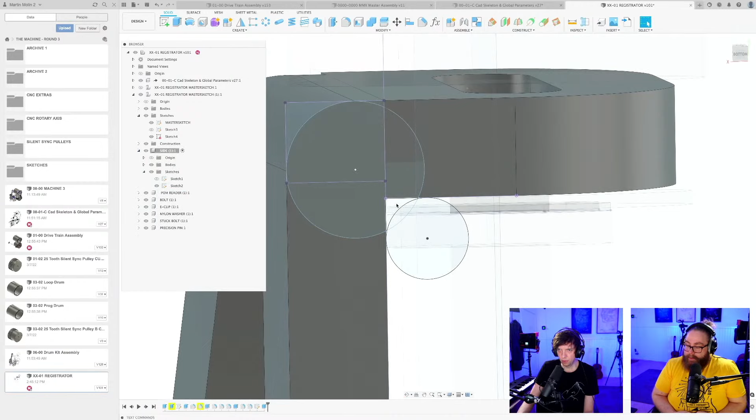So I just cut off the corner here, and I'm going to also fill in the inside corner here. When I was working on the Marble Machine X, repetitively welding 38 things, for an inexperienced welder, it's just a huge amount of work. I'm gonna extrude it up to this little thing. And now we have an ugly representation that this is a bend. Let's make this larger.

No, we're done with this part now. Check mark. Let's have a last look at it. Do we need to add anything to our Excel sheet now? Like the bent parts? We should definitely add it into the PBS just for sake. Yeah. Because it feels nice. I like this design. It's not bad. I just hope this thing doesn't bend, but we can make it larger. It's a 100 times improvement compared to the Marble Machine X in usability.

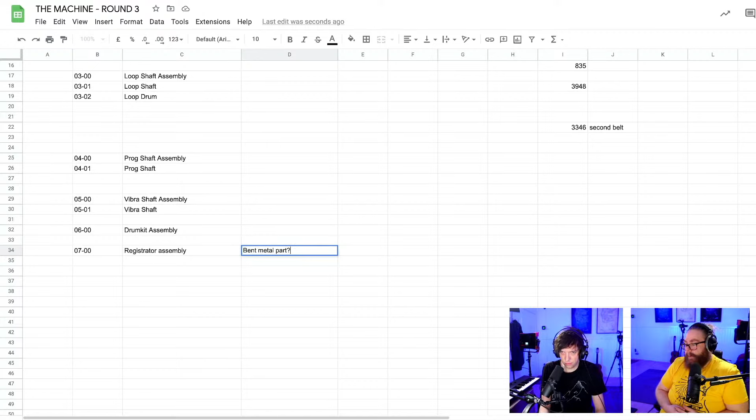Perfect. Nice. Okay, so that was a little W, as they say across the pond when it's a win. We take the L for the morning, we take the W for the afternoon. That's just how it goes. So yeah.

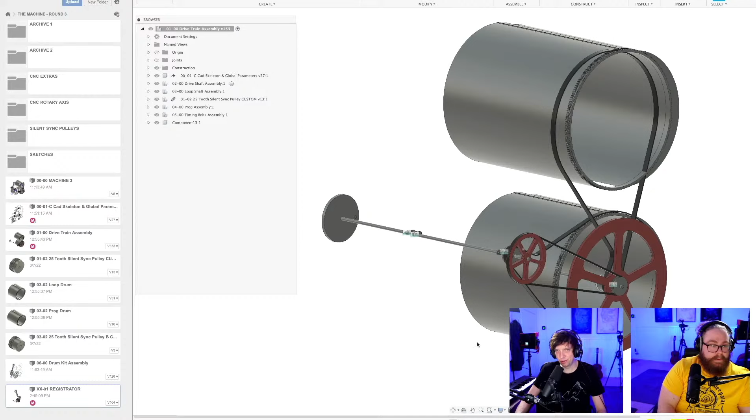I don't know why they make them red. Was it for everyone to just keep distance to the flywheel that will kill you? Or was it just some easily accessible paint? That would be fun if someone knows the historic reasons why flywheels are red. That would be super fun. Maybe red was a code for a moving part or something.

But as you can see here, our model has died quite excessively. And we had a crash. I tried to move the loop drum to have more space for some stuff. And things did not end up well. But before going into a new chapter, let's look at some nice suggestions coming in the link from the description.

People are saying anti-rust paint. Anti-rust was red because of some kind of chemical. Rust protection paint. And it was red because of some chemical that protected. Why the color red then? Yeah, probably something like that.

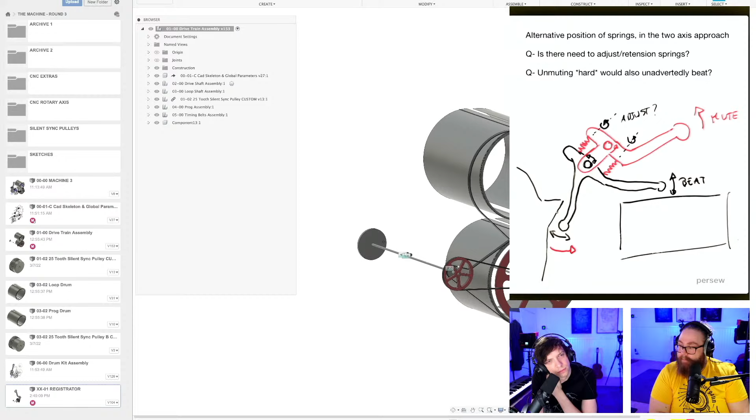Muting levers in the front would put hands in direct marble path. Consider putting them at the side with a bistable mechanism, it would have the added benefit of being where Martin stands. I'm gonna try. So this is skating where the puck is going. I'm just going to find something here.

We have more about the rust paint here. It's iron oxide, aka järnoxid. With the rust paint. There we go, everyone. We've learned something today.

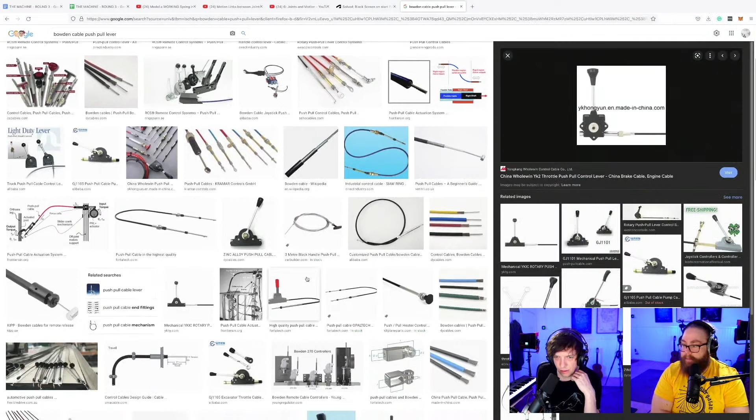And here we go. These kinds of levers, oh, they're behind the screen. Oh, here we see them. Thank you, Hannes. These kind of levers right there, to the side, Bowden cable push-pull lever. I'm thinking this looks like an industrial solution. It's like for giving throttle to your tractor and stuff.

So I'm thinking in my new playing position to the left of the machine, having like 60 Bowden cable levers where the Bowden cables just go to where we need the mechanical action is a very good idea. So we don't have to have a physical connection, or rather we have a physical connection, but it's a snake that we can pull. Imagine just taking like 60 Bowden cables out from one lever station and just have them go out like veins. It will look cool, right?

And so if I go back to Fusion 360, I'm already mourning the fact that you won't see the lever from the audience perspective, because if we're gonna stand like this with the bass guitar, honestly, I'm thinking maybe we should demirror the machine again. We're gonna see. We need to have all the levers here. So yeah, good point. Completely correct, gauging where the puck is going. But my thing is the Bowden levers, industrial Bowden levers.

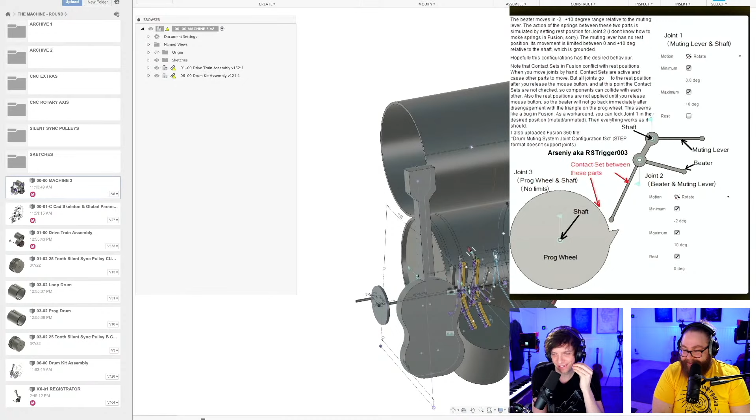Second spring could be placed here. Yep. Thank you, Mick. That's exactly the same sketch as before. And there's a Fusion file, but we also have an image from that file. So he took the CAD file from this morning and made something. This is why it was a horror show this morning. I hope no one is using that video as a tutorial for contact sets, because that was awful. Okay, so we definitely need to look at this Fusion file after, because maybe this has been figured out by whoever has sent this in. Arseniy, aka RSTrigger003. So I'm gonna look at this later.

And here we have a little video. Okay. Oh wait, can I see that again? I think it will loop here, right? Oh, it looked like they have solved it. This is super nice with you sending a little video. Is this from the same person? No, this is from Simon Bianche. Okay. So they did solve it, because this is acting exactly the way. Yeah, this is what I failed in creating this morning. Interesting. Do they write how they created it? No, perhaps he can reach out somewhere here.

Yeah. Awesome. Then we have Simon Briner, the last one here, a muting idea. Active, stopper, muting lever. Okay, so for next stream we need to resize this screen because I'm having trouble seeing. You want a bigger one? Yeah.

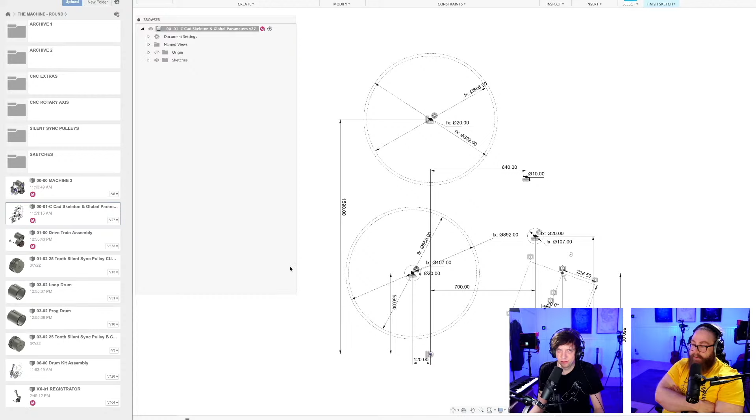And now we know why flywheels are red. It's because of iron phosphate. No, iron oxide. Iron oxide has rust protection properties. Abilities sounds cooler though. I'm not as uncomfortable in my skin anymore today.

What's our next project? Fixing the parametricness of our serious CAD models. Oh, nice. Yeah, so I have moved the loop drum, because we had too little space between the loop drum and the kick drum, so I have moved it 12 centimeters to the left, and things broke. So let's go ahead and see where my parametric things have failed. Here you can see that some circles have moved, and we're gonna find out exactly why.

Iron oxide is rust, people are saying here. They just put the rust on, so the rust couldn't get there first. Yahoo! You see, we're not as smart as we look, people.

Fusion is working, as you can see here. This is our Fusion waiting screen.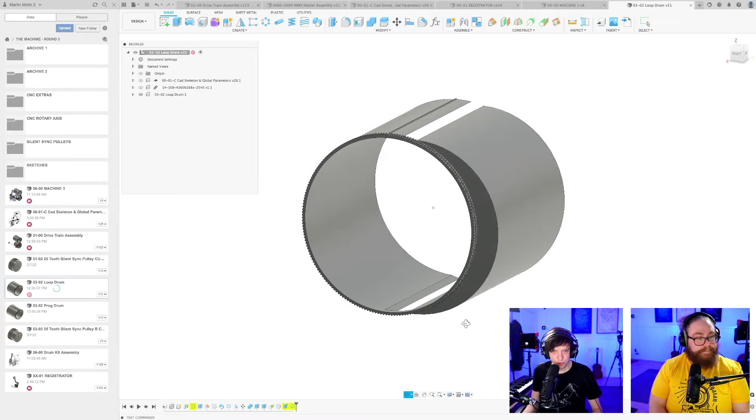So now let's head over to this sketch that is yellow in the timeline down here.

Yellow sketches is like yellow snow. Do not eat it. We learned that early as kids in Sweden. If snow is yellow, try to not eat it. Yeah. Public announcement right here on Wintergatan Live.

Why has this moved? This freaks me out. This should not... What is this? What is this? What is happening? Huh. Wait for it.

Do you remember, Hannes, when I was going on and on and on about fixing your concentricness? Oh, how could I ever forget that? Yeah. I was on that forever, right? Yeah. I've been banging that programming drum.

Because you see the yellow sketches here, purple sketches, they have moved correctly, but my black sketches have not followed. And that, green. I'm ashamed of myself. Don't be. It's the green. I cheated. Oh no. It caught up on you, didn't it? Of course, I can't make a green tooth pattern. So green is a cheating way with your sketches. I locked it with this, and now I know why my model died. Okay, this is a beginner lesson. I have to remove the green things, and then we can repair this. Okay.

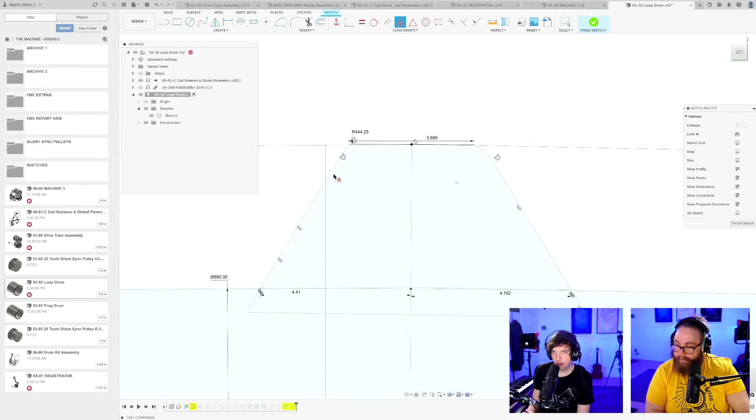So let's first turn all the lines blue and then try to make them black. One color at a time. Yeah, and look what happened now. Now they're trying to fix it and my tooth is broken. Ooh, a dentist appointment coming up. Oh wait, I know what to do. Scream in panic. The tooth is black. Okay. I'm with you now. Let me try to make emergency dentistry on this one.

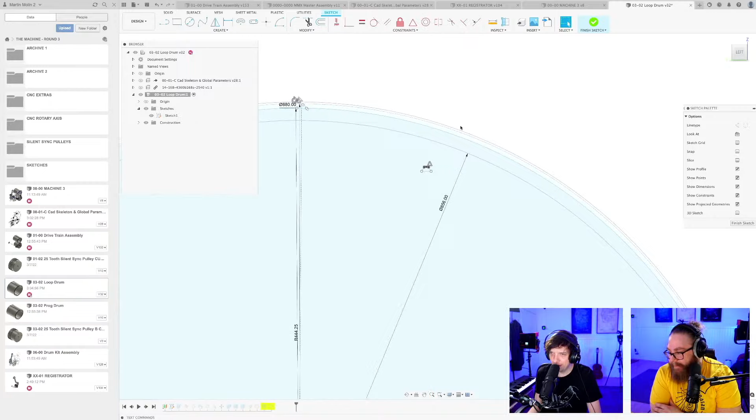So what are you doing right now? You're just redoing or fixing or what's happening in front of our eyes here? Yes, good, well done, demon director over there, providing some context. I'm trying to keep these CAD files parametric, which means that we can move things around. And my mistake was that the tooth for this gear belt was not black. All lines need to be black. It was green. I locked them in place and forgot about it. And now I'm going to try to constrain this in a way that it can move around.

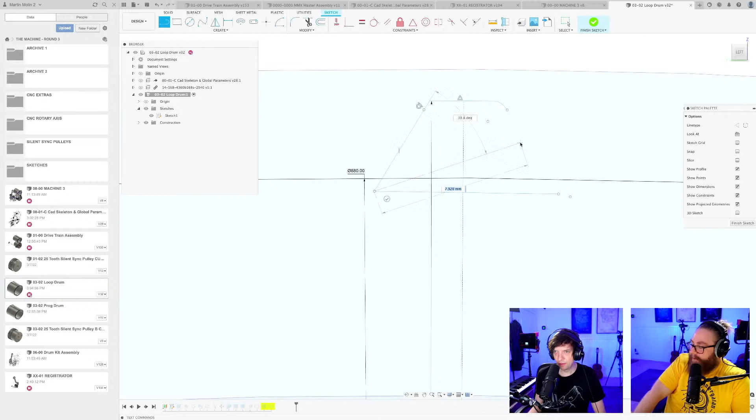So purple is also okay. And this orange here is a trick because it's actually from a derived design, I think. Is it not? Maybe it's not. Oh, look at this. Everything falls apart in front of our eyes. Witness me. So, what happens if I delete this? Okay, good. Good riddance. Splendid riddance. Going to do this. So this tooth is from the pulleys. I know I'm going to redo this one day, but I just want the...

Is this a curve? What is this? What? Oh, so we're in a different plane. Okay, that explains some stuff. What is this? We have... Okay.

What is this? I have inadvertently created a 3D sketch. It's a classic stupid mistake. That explains a lot. So let's not connect those two. But why is this in the same sketch file? Because it doesn't say 3D sketch here.

You know what, Martin? It might seem like you don't know anything right now. Just let me read this then from Alarmaji. Welcome back. Very glad to see you continue. Your whole journey with the MMX and YouTube should be mandatory learning material for engineers. Thank you so much, Alarmaji. Thank you. And Fabrizio Witt chimes in, Alarmaji, 100% agreed. I've learned much here and I am an engineer myself. Yeah, that's awesome. That's awesome. I just hope I'm learning something as well.

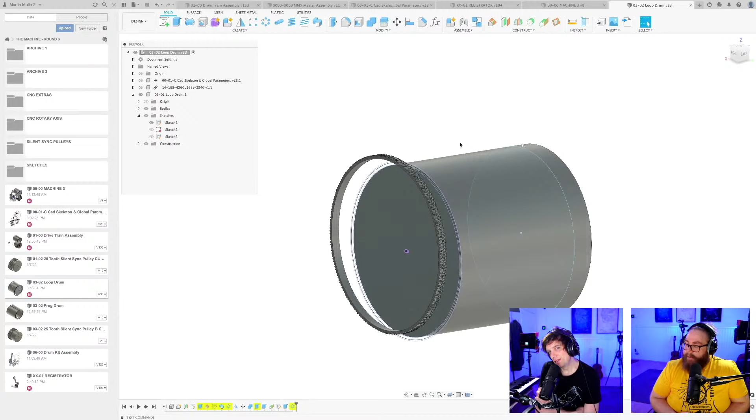So now I'm like questioning the foundation, how I built this CAD design. Again, I restarted 4 times in 4 days. So this will be a reoccurring theme. And I think everyone out there who's CADing recognizes this situation. So for advanced components, it might, because this comes from my fear of Fusion joints. But I'm jointing this in place anyway. No. Loop drum, it's actually CADed in place. Honestly, this was actually just a CADing mistake. Let me try to fix it. We're gonna see.

So I'm witnessing something that I've never seen in my Fusion life. Normally when you have stuff in 2 planes in one sketch, this box is ticked 3D sketch. So if I'm not misreading this, we're looking at one sketch with sketch in 2 planes. But the 3D sketch box is not. Come on, CAD geeks out there. Perhaps you can see where we need to go.

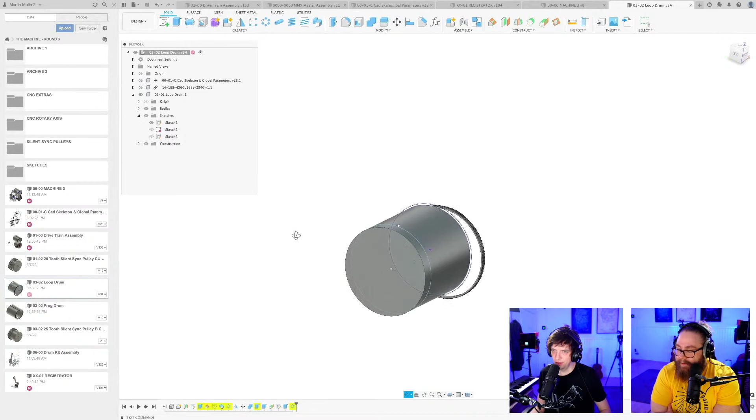Yeah, this is a horror show, Hannes. Oh. Oh no. This is another horror show, my friends. Do I have to really do this one from scratch? What are you doing over here? You might think it's a horror show, but it's actually a nice comedy for me over here. Yeah, it's like a Greek tragedy. Yeah, people love it.

Okay, let's take it as a fantastic lesson. Let's drink some water and let's CAD this part from scratch. There we go. And let's make it with some more beautiful constraints. Jeff Matson: Martin, you probably need to clean up your history hierarchy. Did you ever learn how to do that? Ooh, no. History hierarchy. That's interesting. Good idea. Sounds badass. Let me do a quick Google on that.

Do it. Let the people see what they really came here to see. These 2 beautiful gentlemen sitting right here. Normally you leave that judgment to the audience, but okay.

Organize design history, Autodesk forums. Stuck on a workflow. History hierarchy. Jeff Matson: No, Autodesk causes ghosts like this when you think you deleted something you haven't. And I'm with Inuyasha here. Why do components have a history? This is so confusing. I'm with you.

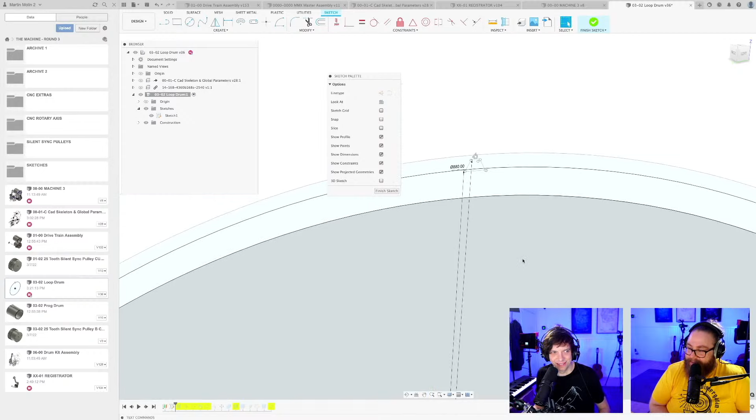So let's try to save this if possible. Jeff Matson: I used to have a job cleaning up people's animation work. Okay, so he has done this before. That sounds really cool. So now if I can just turn this little triangle black, we have made some progress. It totally makes sense that I couldn't do what I wanted to do before since the components were not in the same plane. So no surprises there.

So what I need to learn, also really need to learn in these streams, is that some jobs you can never do stressed in CAD. And like some jobs are just meant to be carefully done. So now I'm going to try to calm down and do this carefully. So now I can add this constraint. Progress, result, like Ricky Gervais would have said. So, result.

These are not beautiful, but I've calculated this gear tooth size. We have yet another black line. Result. Oh, we're getting there. Is this not... oh, this is not... No, don't be hasty. We have yet another black line.

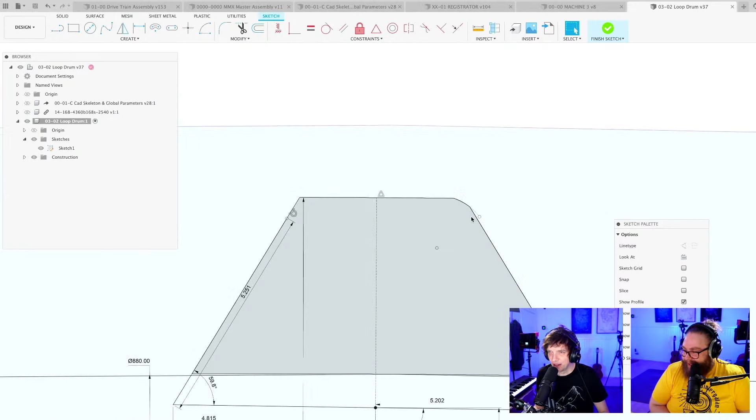So funny that I left this sketch green and then tried to brag about how parametric my new CAD skills are in the stream, like, was it yesterday? It was this morning, and Fusion crashed and I was like, stupid Fusion. Stupid Fusion. Okay, I'm feeling it. I'm feeling it now. Yeah.

Javinsky: this live stream was very parametric. Boom. I don't know, I'm not sure exactly how to take that. It sounds like a compliment. Yeah, take it as a compliment. This is still early days. Early days.

Oh, look at that. Everything is black. And now let's see if we can just recreate this gear a little bit. So this should be this. And we have to choose this. Okay, we're getting somewhere. Yes. Cleaning up CAD is... this plane is missing its line, so I have to re-choose that. So I should actually go over to this screen.

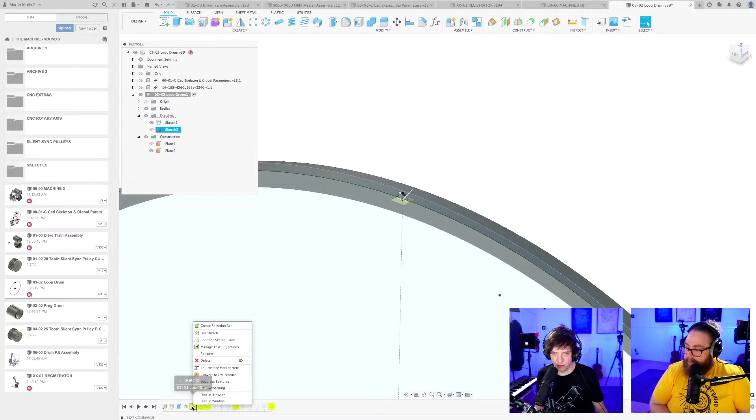What I'm doing now is cleaning away all the yellow snow down here by editing all the yellow features. So let's see what's wrong with this one. Review warning: project source is lost. That makes sense. Yellow lines are the same thing. That's like yellow snow, don't eat it. So I'm not going to eat that one. We're going to make a new beautiful purple line. And this is 75 degrees because that's the angle of the herringbone pattern. And now you see the sketch is clean again.

Our sweep. Let's edit this feature. Missing profiles. Okay, good. Circular pattern. So you can see that Fusion is trying to make the teeth, but it's making them along a previous axle. So let's just edit the feature and choose the correct missing axis. Let's choose this one. Snap it into place. Computing sweep. Whoa! Good, Fusion. Mirror. Oh, mirror is working. We have our herringbone back. Nice. Patience, you know, is a virtue.

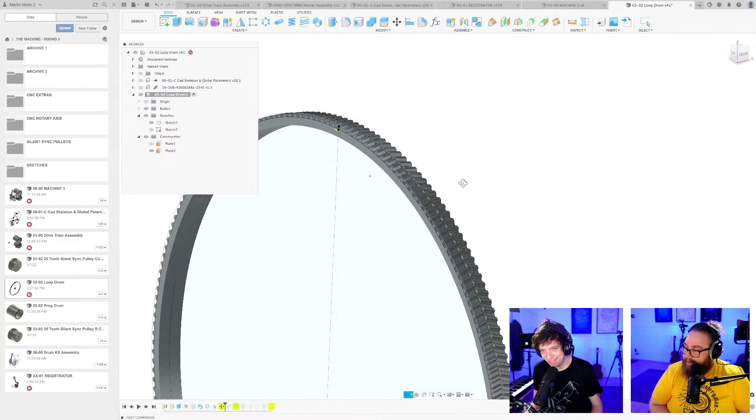So this move command, we have to move. That gives me an opportunity to show. The axis is not there. Maybe if I choose the axis. So I want to shift it one gear tooth, and this is a pretty cool trick. You can see the gear teeth are alongside. How did we do it? We did 360 divided by 200, because we have 200 teeth. You put that in a parenthesis, and you multiply that number with a half. Boom. I'm seriously not good at math, so when I figure these kinds of things out, I'm very happy with myself. That's half a tooth right there. Now you can see the herringbone pattern is doing this zigzag, tractor tire thing.

And now we have to combine these two parts into one. Yeah, that worked. Good. And now Fusion is still trying to extrude the wrong profile, so this should be a simple fix. We want this little thing as well. Five millimeters, that's just the clearance for the timing belt on the edge. And now this is also going to be the wrong profile. No, that's the correct profile, but it's filled. What? That makes sense.

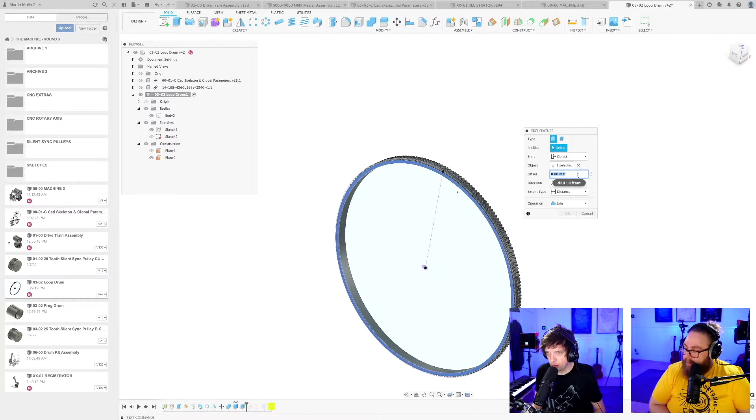Offset, 5 maybe? And the distance, what's happening now? Why can't I choose it? Something is wrong here. We have to do this twice, Hannes. That's why. We have the other drum that went wrong in the same way. Fun times. That's nice. Sometimes when a feature breaks like this, it's better to just delete it and redo it. This and this profile. Start with an offset of 5.

But I do feel these complicated designs should be CADed on the origin point, and they should just be moved around in another way, so to speak, if that makes sense. Because this is a little bit of a horror show in itself. But you know what, Martin? We're learning. I think we learned something today.